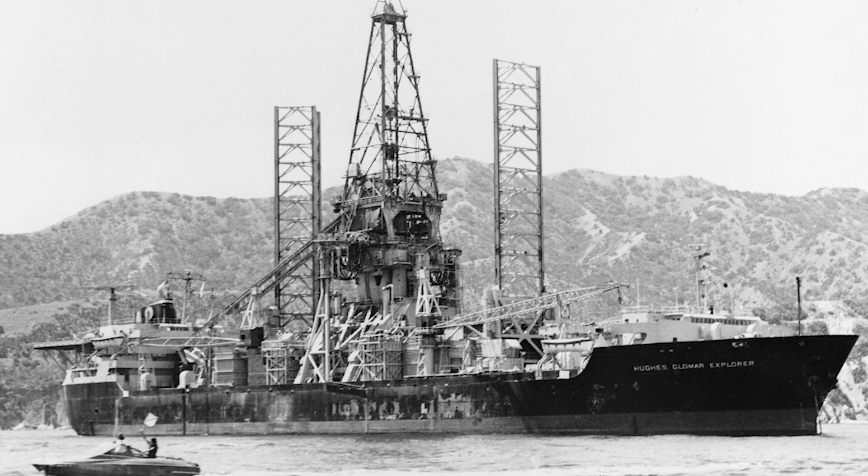July 4th, 1974, Pacific Ocean. 16,500 feet beneath the surface, a Soviet nuclear submarine lies broken in 3 pieces on the ocean floor. The K-129, carrying nuclear warheads, missile guidance systems, and codes that could shift the Cold War's balance of power.

Every salvage engineer in the world agrees, lifting 2,000 tons from such crushing depths is impossible. The water pressure alone would snap any cable system ever built. Naval doctrine states that deep-sea recovery maxes out at 10,000 feet. Anything deeper remains forever beyond human reach.

But 3 miles above the wreckage, the Hughes Glomar Explorer holds position with computer-controlled precision. Inside the ship's classified operations center, 35-year-old Sherman Wetmore watches telemetry screens as his impossible creation, a mechanical claw nicknamed Clementine, descends through the abyss on the longest pipe string ever assembled.

The CIA had approached him 2 years earlier with a challenge that defied every principle of marine engineering. Soviet surveillance ships circle nearby, convinced they're witnessing a routine manganese mining operation. They have no idea they're about to witness the greatest intelligence theft in Cold War history.

One engineer had refused to accept impossible. The briefing room at CIA headquarters carried the stale scent of cigarette smoke and classified anxiety. July morning light filtered through reinforced windows as Deputy Director Carl Duckett spread grainy photographs across the mahogany conference table.

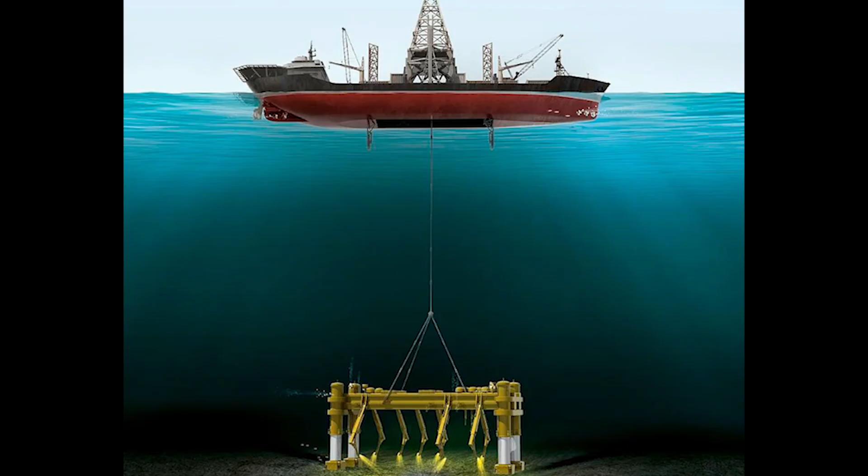"What makes you think Global Marine might see this differently?" Wetmore asked, though his mind was already racing through unconventional approaches. CIA Project Director John Parangosky leaned forward, his fingers steepled in the gesture of a man who had overseen the most sensitive reconnaissance programs of the Cold War.

"Because you pioneered dynamic positioning for Project Mohole. Because you've pushed the boundaries of deep-water engineering further than anyone in the industry. And because this isn't really about engineering," Parangosky slid another folder across the table. Inside, intelligence assessments painted a strategic picture that made Wetmore's pulse quicken.

Soviet naval activity suggested they were developing submarine-launched ballistic missiles with 1,500-mile range. Current American intelligence estimated Soviet submarine technology lagged behind U.S. capabilities by at least 5 years, but the K-129's guidance systems could reveal whether Moscow had achieved targeting precision for mid-ocean patrol stations.

"The submarine's missile compartment contains navigation computers, targeting algorithms, and nuclear warhead designs," Parangosky explained quietly. "But more importantly, it contains codebooks and operational procedures that could reshape our understanding of Soviet strategic doctrine."

Wetmore studied the technical specifications. Golf II-class submarines carried 3 ballistic missiles, each with nuclear warheads designed for targets 1,500 miles inland. If Soviet submarines could launch accurately from mid-ocean positions, they could strike American cities while remaining virtually undetectable. The K-129's guidance systems would reveal whether this capability was operational or theoretical. "The water pressure alone would crush any conventional capture system," Wetmore said, thinking aloud.

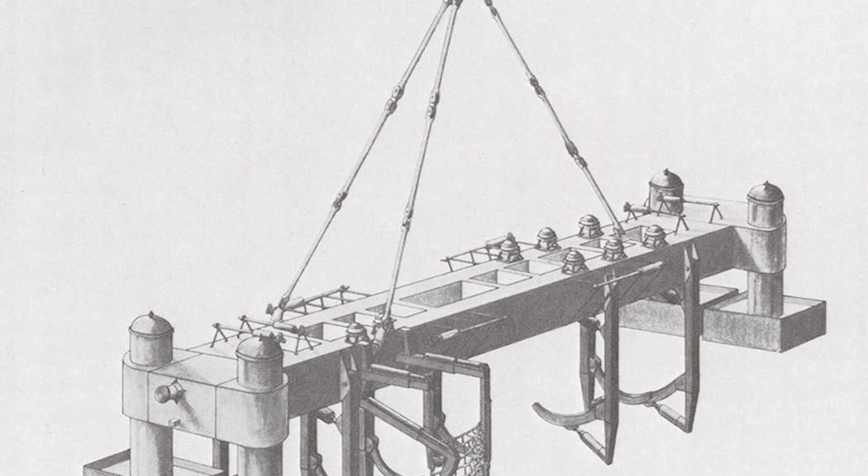The room fell silent as Wetmore absorbed the implications. 18 months to design, build, and deploy the most complex deep-sea recovery system ever attempted. 18 months to prove that American engineering ingenuity could achieve what Soviet doctrine considered permanently impossible. 18 months to steal 2,000 tons of submarine from the bottom of the Pacific Ocean while Soviet surveillance ships watched every move.

Parangosky closed the folder containing the strategic assessments. Mr. Wetmore, we're not asking you to salvage a submarine. We're asking you to steal one, and the Soviets can never know it happened.

The status quo had permanently shifted. This was no longer about marine engineering. This was about proving that democratic innovation could overcome any technical barrier the Cold War presented.

November 1971 brought Sherman Wetmore to the sprawling shipyards of Long Beach, California, where Howard Hughes' latest venture was taking shape with the precision of a military operation disguised as commercial ambition. The Hughes Glomar Explorer rose from the construction dock like a technological cathedral, 618 feet of revolutionary marine engineering that would either prove American ingenuity could overcome impossible odds or become the most expensive failure in intelligence history.

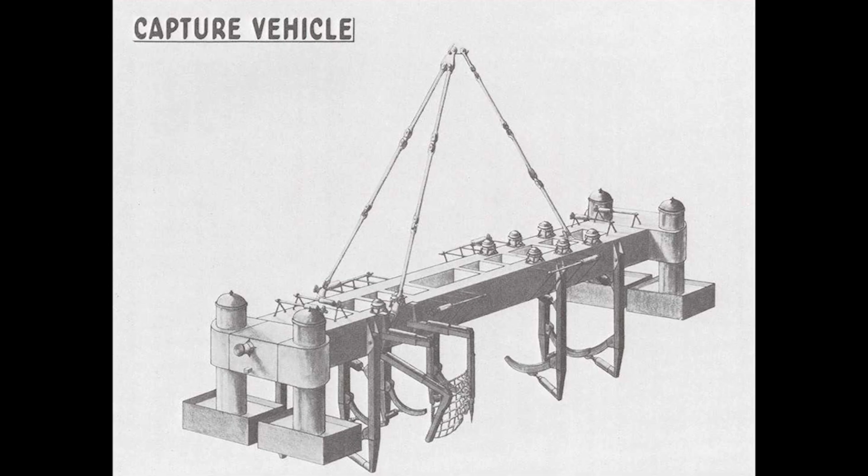Wetmore stood beside the massive hull opening that would define the entire operation's success or failure. The moon pool stretched 200 feet from bow to stern, an enormous center well that could be sealed off from the surrounding ocean once a captured object was pulled inside. No ship in maritime history had ever been designed with such an opening.

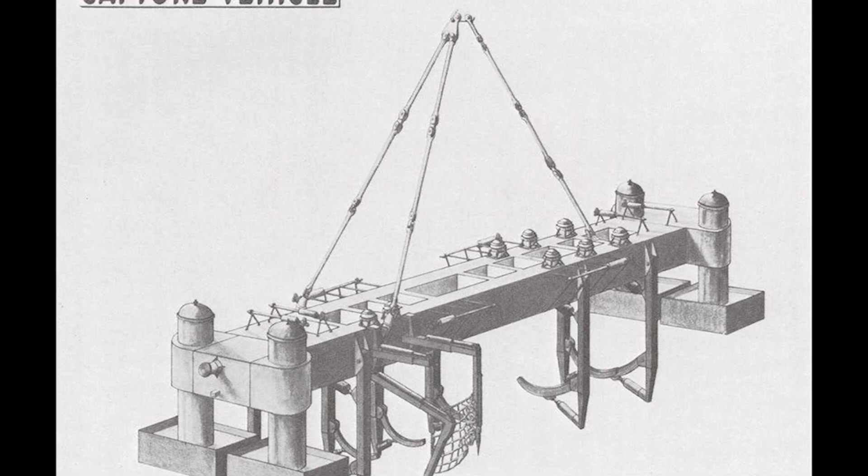Naval architects had initially declared the concept structurally unsound. The hull breach would compromise the vessel's integrity in heavy seas. But Wetmore's calculations proved the reinforced steel framework could maintain structural strength while providing covert recovery capability. The dynamic positioning system represented the first of 4 integrated breakthroughs that would make the impossible attempt feasible.

Computer-controlled thrusters mounted beneath the hull could hold the 50,000-ton ship nearly motionless above a target 16,500 feet below. The precision required was staggering, maintaining position within 100 feet, while ocean currents, surface winds, and the massive stress of lifting operations threatened to push the vessel off target.

Wetmore had adapted the technology from Project Mohole's deep-water drilling systems, but scaling it for submarine recovery required innovations that pushed 1970s computer technology to its absolute limits.

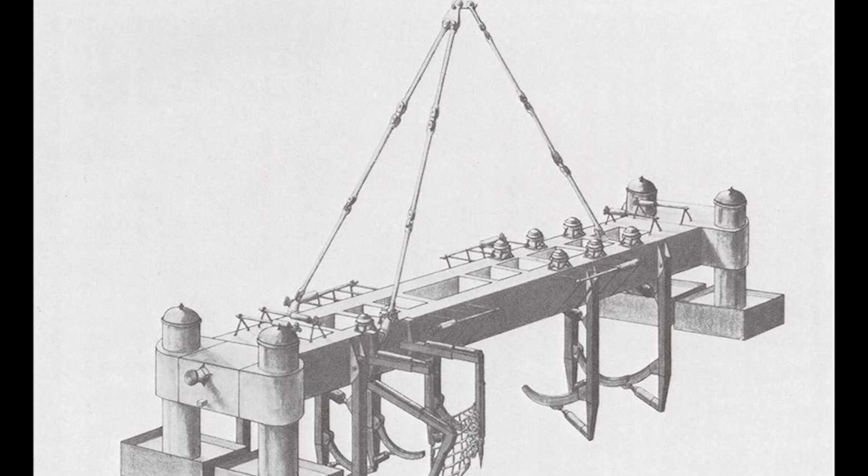The heavy-lift pipe string presented even greater challenges. Each 60-foot section connected with specially designed joints rated for 4,250 tons of lifting capacity. The complete assembly would stretch nearly 3 miles from surface to sea floor, requiring materials engineering that exceeded anything previously attempted in marine operations.

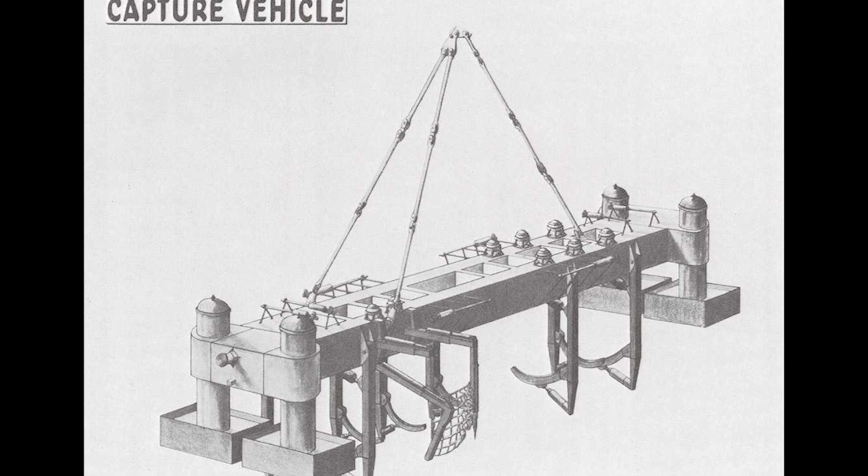Wetmore selected a tapered design, thicker sections near the surface to handle maximum stress, gradually tapering toward the bottom to reduce overall weight. Every joint underwent pressure testing that simulated the crushing forces they would encounter at maximum depth.

But the third breakthrough proved most revolutionary. Conventional hydraulic systems used oil-based fluid that would freeze solid under the pressure and temperature conditions at 16,000 feet.

Wetmore's innovation eliminated this limitation entirely by using seawater itself as hydraulic fluid. The system would pump ocean water down through the pipe string at 750 pounds per square inch to power the capture mechanism. The ocean became the hydraulic system, an elegant solution that turned the hostile environment into an operational advantage.

The seawater hydraulic concept required complete redesign of the capture vehicle's control systems. Traditional hydraulic components couldn't function with seawater, which corroded metal and lacked the lubricating properties of conventional fluid. Wetmore's engineering team developed specialized components using materials that could withstand both the corrosive effects of seawater and the crushing pressure of the deep ocean. Every valve, actuator, and control mechanism required custom manufacturing to tolerances measured in thousandths of an inch.

Howard Hughes proved as revolutionary as the technology his cover story protected. When CIA officials approached the billionaire with their audacious fiction about deep-sea mining for manganese nodules, Hughes agreed instantly. His empire of private companies provided perfect operational security, no stockholders demanding explanations, no Securities and Exchange Commission oversight, no public scrutiny of expenditures that would eventually reach $800 million.

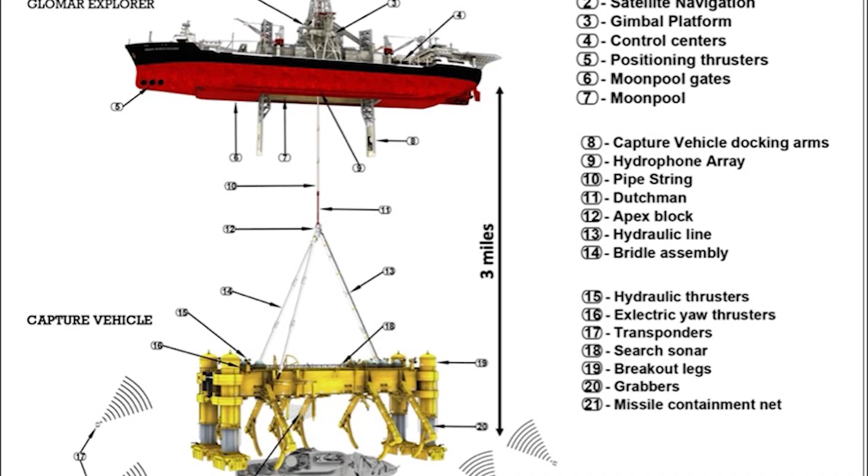But Soviet naval intelligence was drawing uncomfortable conclusions. Reports reached Moscow describing American deep-sea operations that exceeded any known commercial mining requirements. The scale of equipment, the precision of positioning systems, and the massive lifting capacity suggested military applications rather than mineral extraction. KGB analysis recommended continued surveillance while stopping short of direct confrontation.

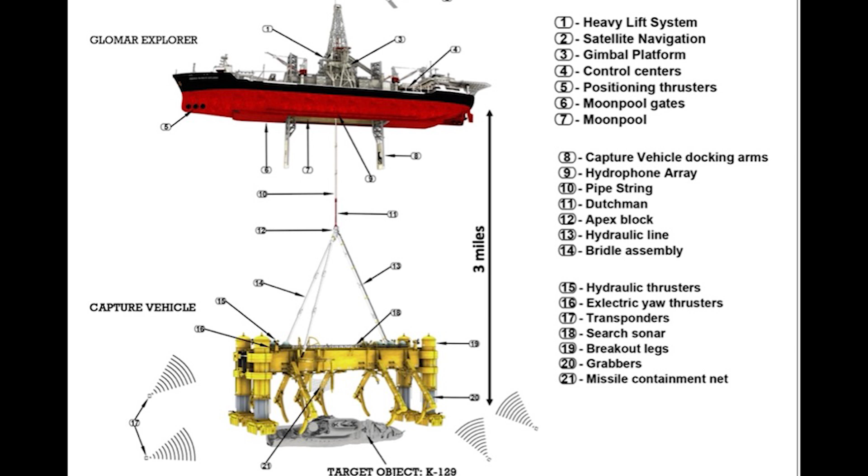By late 1973, Wetmore's impossible system was ready for operational deployment. Four revolutionary technologies had been integrated into a single platform capable of achieving what every naval engineer considered technically impossible. The Hughes Glomar Explorer could lift 2,000 tons from depths that had never been reached by recovery operations. The cover story had convinced international observers while providing perfect operational security.

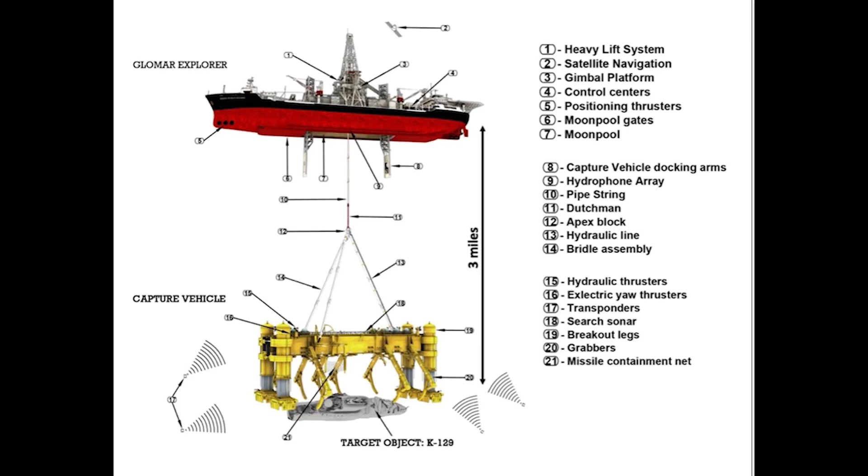The only remaining question was whether maraging steel and seawater hydraulics could function flawlessly 16,500 feet beneath the Pacific Ocean, where a single mechanical failure would doom the most audacious intelligence operation of the Cold War.

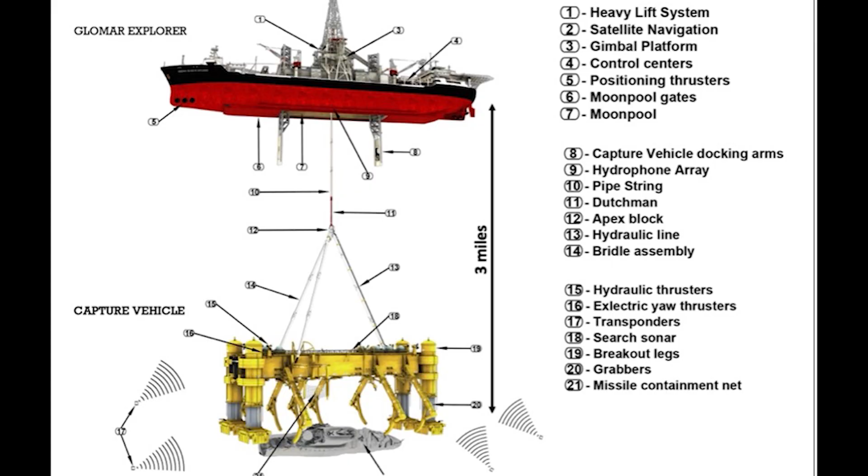April 1973 brought Sherman Wetmore to the classified workshops of Lockheed Ocean Systems in Redwood City, California, where the most complex deep-sea mechanism ever designed was taking shape in sections so sensitive that each component required separate security clearances. The capture vehicle, nicknamed Clementine, represented the convergence of mechanical engineering, materials science, and hydraulic innovation pushed beyond every known limit of underwater operations.

The strong back formed Clementine's structural foundation, two massive steel beams stretching 179 feet long and 31 feet wide, designed to distribute the enormous stresses of lifting a 2,000-ton submarine from crushing depths.

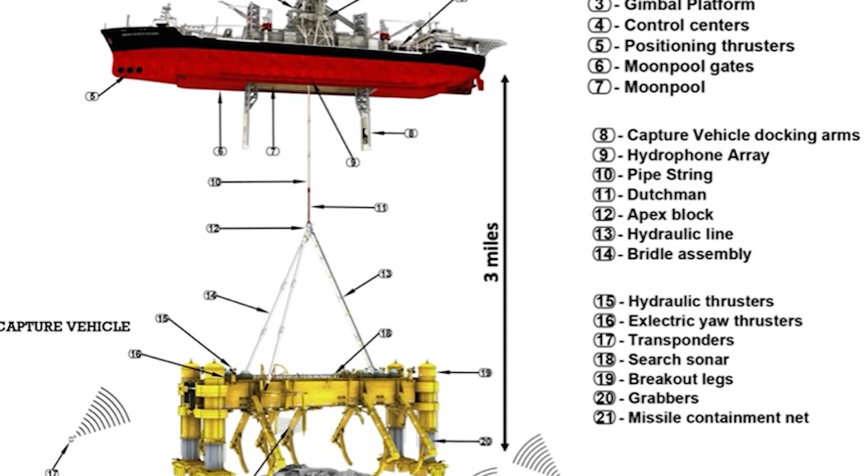Wetmore had specified the dimensions after countless calculations involving load distribution, structural integrity, and the precise geometry required to align with a Golf II class submarine's hull configuration. The beams themselves weighed nearly 400 tons, requiring specialized transportation from the steel mills of Pennsylvania to the California assembly facility.

8 hydraulically operated grabbers mounted along the strongback's length would perform the actual capture. Each grabber consisted of articulated steel fingers designed to close around the submarine's irregular hull, while it rested on soft sediment 16,500 feet below the surface.

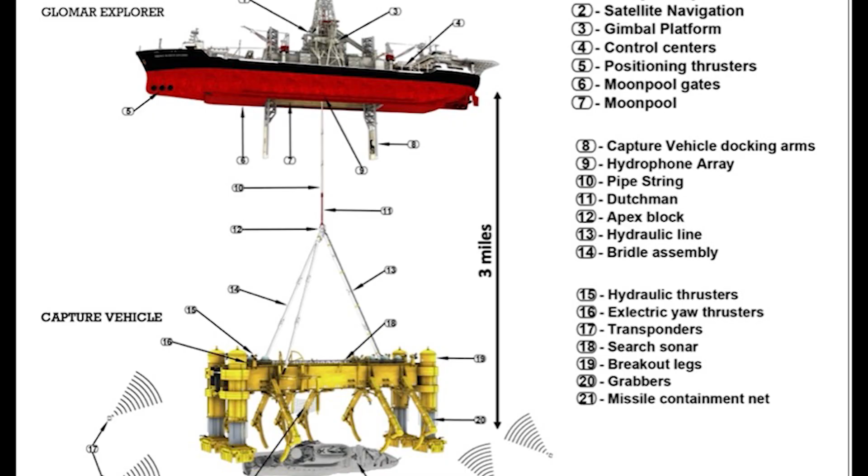The engineering challenge was staggering. The grabbers had to maintain precise alignment with 3 designated points on the submarine's hull while accommodating the unpredictable settling that occurred when a massive object had rested on ocean floor sediment for over 5 years.

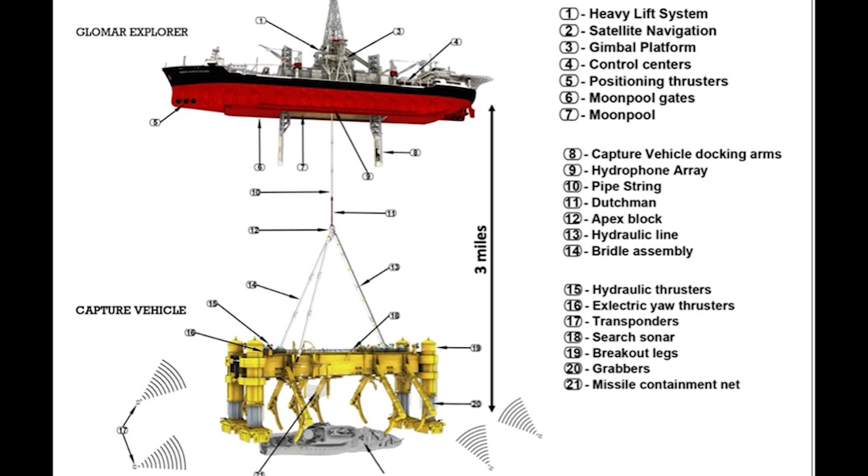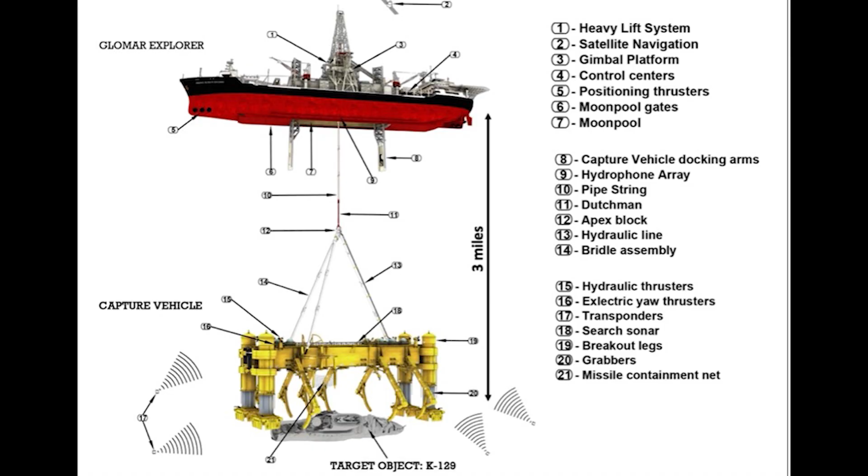Wetmore's team had identified the critical alignment points through careful analysis of the Halibut's reconnaissance photographs. The submarine's bow section offered the most stable attachment point, while the missile compartment's cylindrical structure provided secondary grab points that could distribute lifting forces without crushing the hull.

But the stern section had separated from the main wreckage, complicating the capture sequence and requiring the grabbers to secure an asymmetrical load that could shift catastrophically during the ascent.

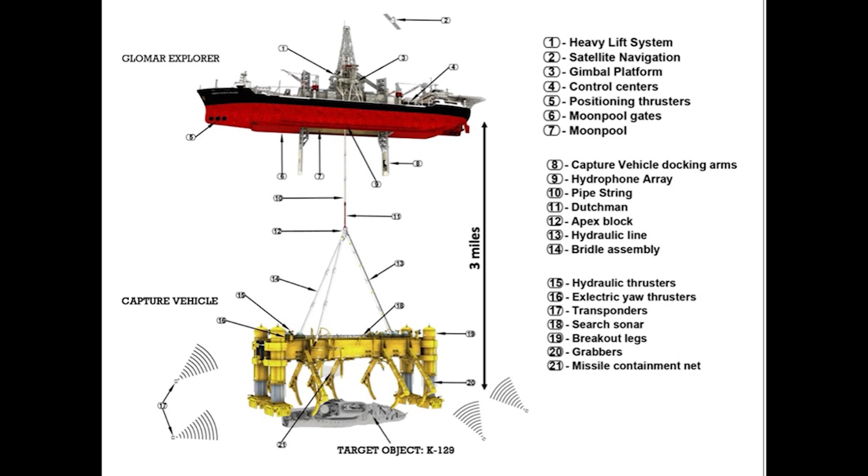The materials science breakthrough came through maraging steel, an alloy that offered incredible tensile strength but exhibited dangerous brittleness under extreme stress. Lockheed's metallurgists had tested sample components to destruction, determining that maraging steel could handle the lifting forces required for the mission while maintaining the precise tolerances necessary for the grabber mechanisms.

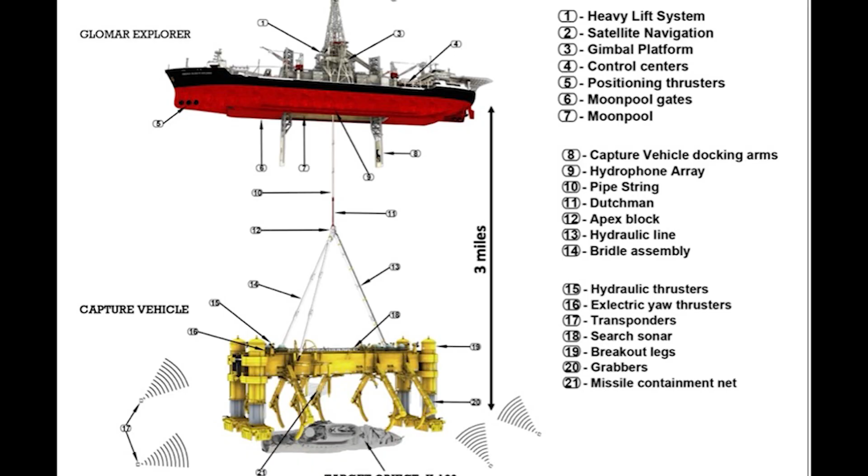But the trade-off was unforgiving: maximum strength for lifting capability, but catastrophic failure if any component exceeded its stress limits.

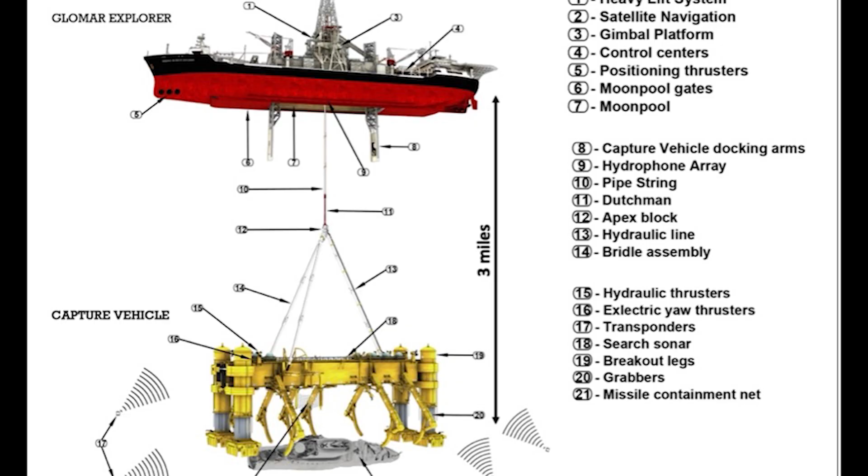The control system represented the most sophisticated remote operation ever attempted at such depths. 2 redundant 3-inch diameter electromechanical umbilical cables ran 17,000 feet through the pipe string, carrying electrical power, hydraulic control signals, and data transmission for cameras and sensors.

Each cable contained dozens of individual conductors, all insulated and protected against the corrosive effects of seawater and the crushing pressure that increased with every foot of descent.

Television cameras mounted throughout Clementine would provide visual feedback during the capture sequence, but the lighting requirements at such depths pushed illumination technology to its limits. Conventional underwater lighting systems failed under extreme pressure, requiring custom-designed units that could function at 7,500 pounds per square inch while providing enough illumination for precise maneuvering around the submarine's hull.

The hydraulic system's complexity multiplied exponentially when integrated with the capture mechanism. Seawater pumped down through the pipe string had to operate dozens of individual actuators with millimeter precision while maintaining consistent pressure throughout the 3-mile-long hydraulic circuit.

Wetmore's engineers designed pressure compensation systems that could adjust for the varying loads as grabbers closed around different sections of the submarine's hull. Testing began with scale models in Lockheed's pressure chambers, where 1/10 scale versions of the grabbers were subjected to simulated deep ocean conditions.

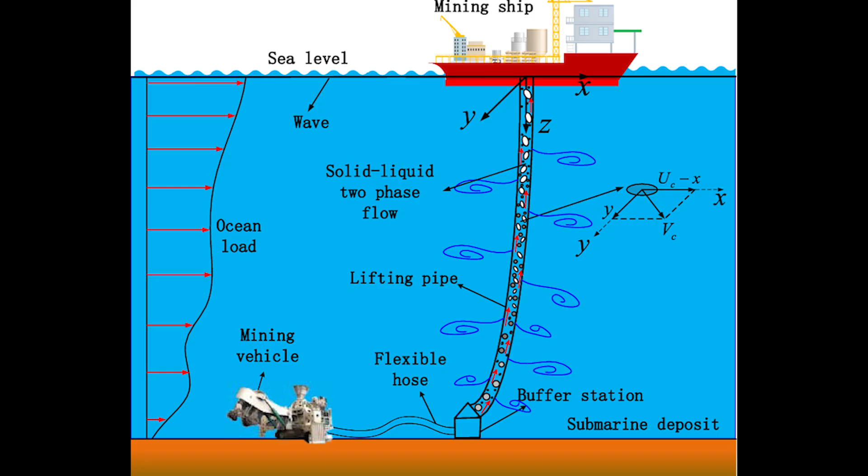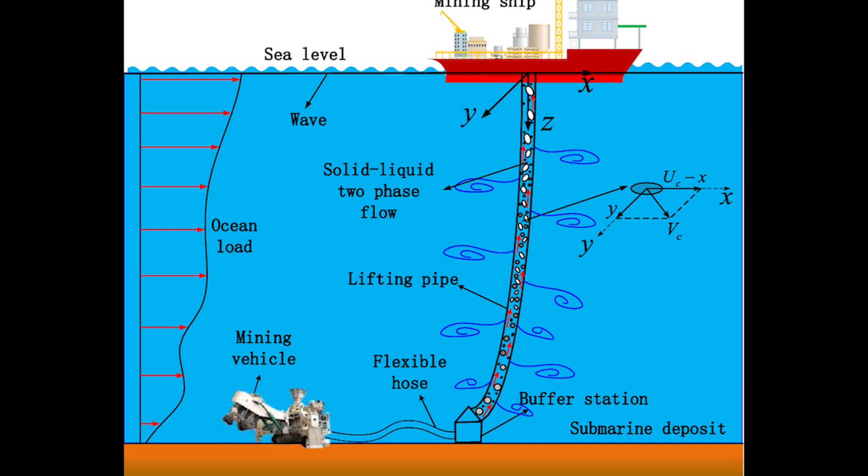December 1973 marked the completion of Clementine's final systems integration. The capture vehicle had proven capable of lifting masses exceeding mission requirements with precision control at depths never before attempted by any recovery operation. Every component had been tested beyond design specifications and proven capable of functioning in the hostile environment of the deep Pacific.

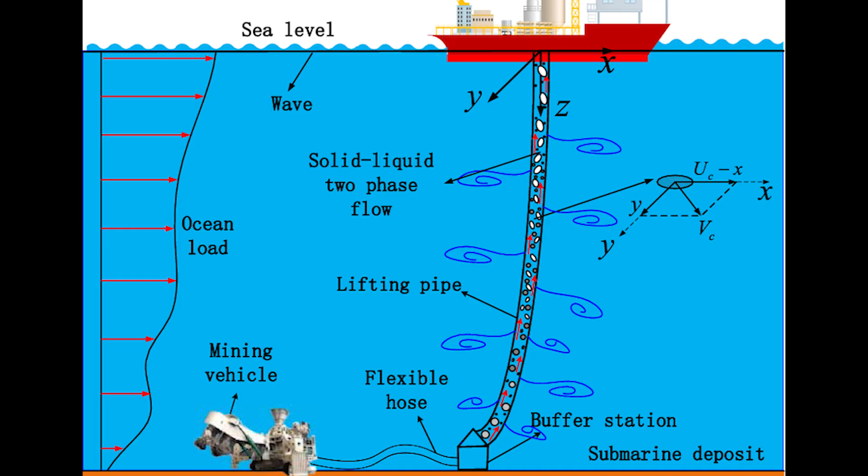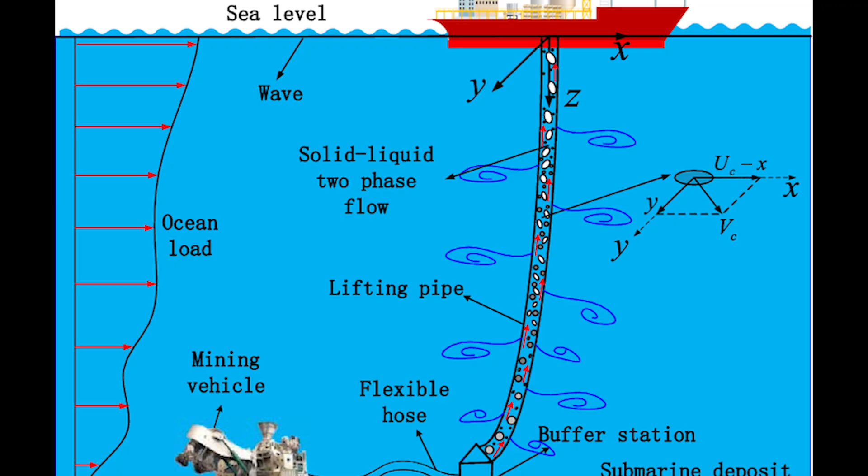The maraging steel grabbers had demonstrated the strength necessary for lifting a 2,000-ton submarine, but metallurgical analysis revealed stress patterns that approached the material's brittle failure threshold. The engineering team calculated that the grabbers could handle the expected loads with acceptable safety margins, but any unexpected stress concentration could trigger catastrophic failure of the entire capture mechanism.

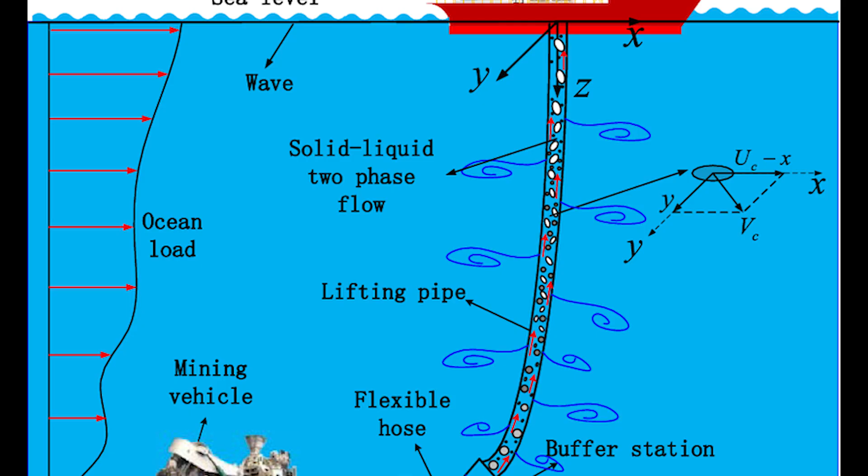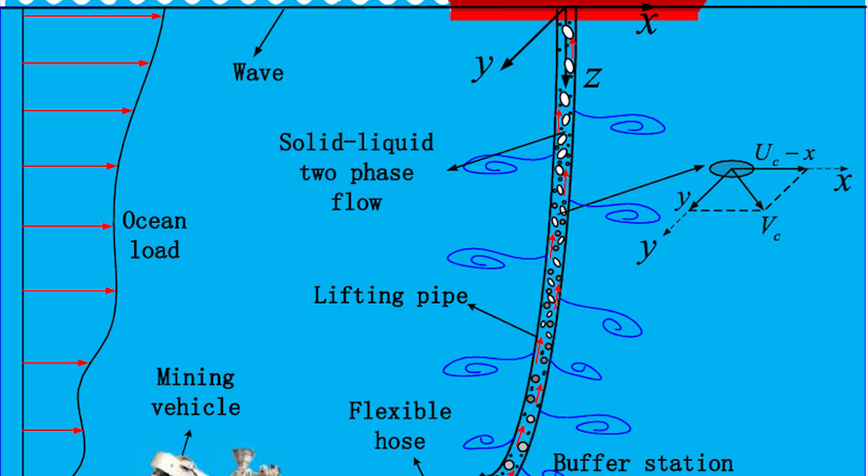As 1974 began, Clementine represented the most sophisticated deep-sea recovery system ever constructed, ready for an operation that would either prove American engineering could overcome impossible odds or demonstrate the fatal limitations of pushing technology beyond its ultimate boundaries.

July 4, 1974, brought the Hughes Glomar Explorer to position 40 degrees 6 minutes north, 179 degrees 54 minutes east, where the Pacific Ocean stretched endlessly toward the horizon under overcast skies that provided perfect cover for the most audacious intelligence operation in Cold War history.

At 1:01 p.m. local time, Sherman Wetmore stood in the ship's control center watching sonar displays confirm what reconnaissance photographs had promised 6 years earlier. The wreckage of K-129 rested in 3 sections on the abyssal plain 16,500 feet below.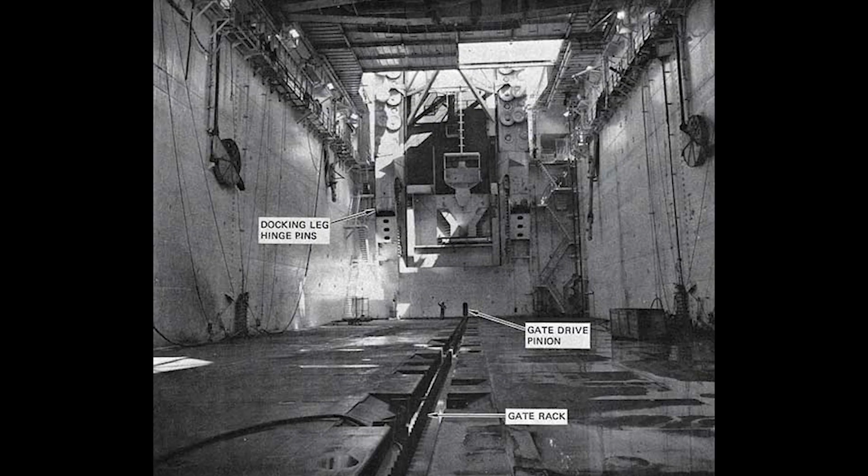The sophisticated dynamic positioning system engaged automatically as the ship reached the target coordinates, computer-controlled thrusters adjusting thrust vectors every few seconds to counteract ocean currents and surface drift. Wetmore monitored the positioning displays with the intensity of an engineer who understood that success or failure would be measured in feet rather than miles.

The submarine's remains lay scattered across roughly 400 yards of seafloor, requiring precision navigation that exceeded anything previously attempted in deep ocean operations. Soviet surveillance had intensified dramatically as the Hughes Glomar Explorer approached the recovery site.

The Chazma, a Soviet naval vessel, had shadowed the Americans for 3 days, maintaining visual contact while radioing regular reports to Pacific Fleet headquarters in Vladivostok.

A second Soviet ship, the SB-10, replaced the Chazma on July 2nd, bringing sophisticated monitoring equipment and a helicopter that circled the American vessel, taking detailed photographs of the deck operations.

But the manganese mining cover story held perfectly under Soviet scrutiny. Hughes's public statements about deep-sea mineral extraction had convinced international observers that the operation represented legitimate commercial mining rather than intelligence gathering. Soviet technical analysts had examined manganese nodule deposits in the target area and confirmed that the ocean floor contained sufficient mineral concentrations to justify large-scale extraction operations.

The pipe string deployment began at dawn on July 5th, each 60-foot section lowered through the moon pool with mechanical precision that masked the revolutionary technology beneath the routine appearance.

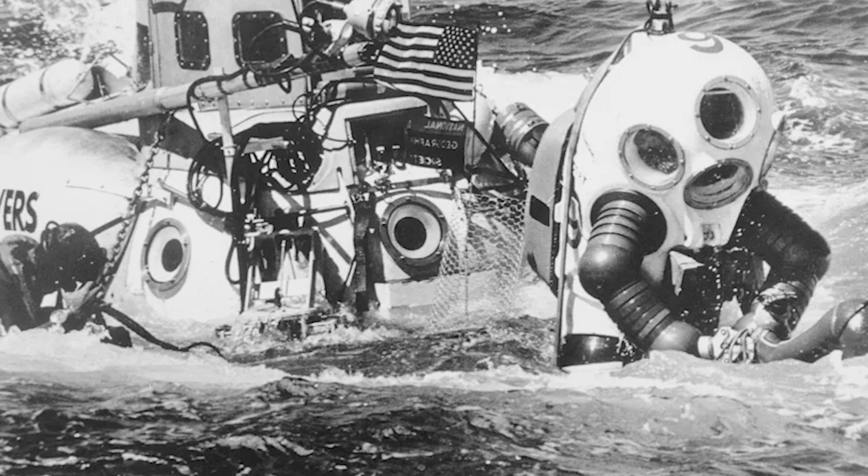Soviet observers on the surface noted unusual activity aboard the Hughes Glomar Explorer, but interpreted the operations as consistent with deep-sea mining procedures. The ship's crew maintained perfect operational security, conducting all sensitive operations within the enclosed moon pool, where Soviet surveillance couldn't observe the actual recovery mechanisms. Radio communications followed commercial mining protocols, discussing equipment status and weather conditions without revealing the historic intelligence operation unfolding 3 miles below.

The grabbers closed around the submarine's hull at 11:47 p.m. on July 8th, achieving mechanical contact with a 2,000-ton prize that could reshape American understanding of Soviet nuclear capabilities. Hydraulic pressure readings confirmed that all 8 grabbers had engaged properly, distributing lifting forces across the submarine structure without exceeding the stress limits of the corroded hull plates.

The ascent began at 100 feet per hour, a deliberately slow rate designed to prevent structural failure of either the pipe string or the captured submarine. Wetmore monitored stress readings continuously as the combined load of Clementine and the K-129 created unprecedented tension throughout the lifting system. The tapered pipe string performed exactly as calculated, with thicker sections near the surface handling maximum stress, while the gradually reduced diameter toward the bottom minimized overall system weight.

At 8,000 feet depth, telemetry confirmed that the submarine remained stable in Clementine's grasp, while 3 miles of pipe string held steady against the enormous forces involved. The impossible was happening with mechanical precision. American engineering was lifting a Soviet submarine from depths that every naval expert had declared permanently beyond human reach.

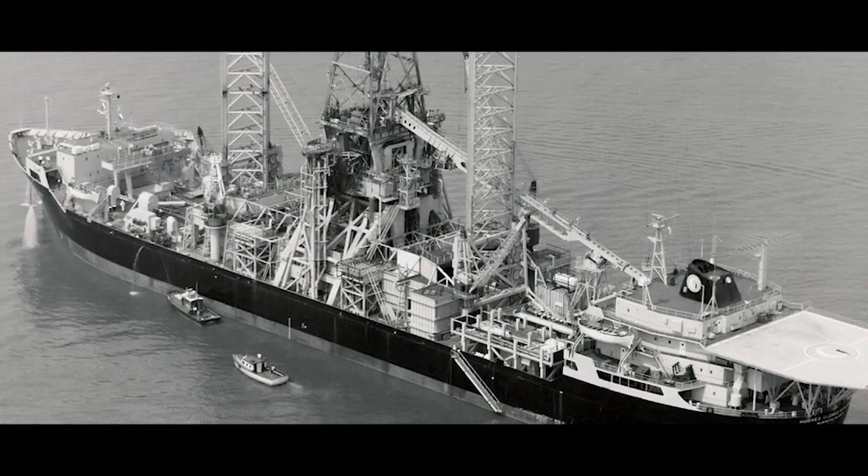August 1974 found Sherman Wetmore standing in the sealed moon pool of the Hughes Glomar Explorer as Clementine's surviving grabbers delivered their truncated prize, 38 feet of Soviet submarine bow that represented both technological triumph and devastating intelligence failure. The forward compartment had survived the catastrophic ascent intact, but the missile compartment containing nuclear warheads, guidance systems, and cryptographic materials now rested permanently on the Pacific floor, 16,000 feet beyond any future recovery attempt.

The human cost emerged first as recovery teams entered the flooded bow section. 6 Soviet sailors' remains were discovered in the forward torpedo compartment, their bodies preserved by the crushing cold and pressure of the deep ocean. These men had died instantly when K-129 imploded during its final dive 6 years earlier, never knowing their submarine would become the target of the most audacious intelligence operation in naval history.

CIA protocol demanded immediate analysis of the recovered materials, but Wetmore insisted on honoring the Soviet sailors first. In a classified ceremony conducted within the ship's moon pool, American naval personnel gave their Soviet counterparts full military honors. The bodies were placed in a specially constructed metal casket due to radioactivity concerns from the submarine's nuclear reactor, then committed to the sea with the same dignity accorded to fallen American servicemen.

The irony wasn't lost on anyone present, enemies in life, but sailors bound by the common brotherhood of men who had chosen to serve beneath the waves.

The intelligence harvest from the truncated recovery proved more valuable than initial assessments suggested. The forward compartment contained 2 nuclear torpedoes with warheads that revealed Soviet nuclear weapon design principles previously unknown to American analysts.

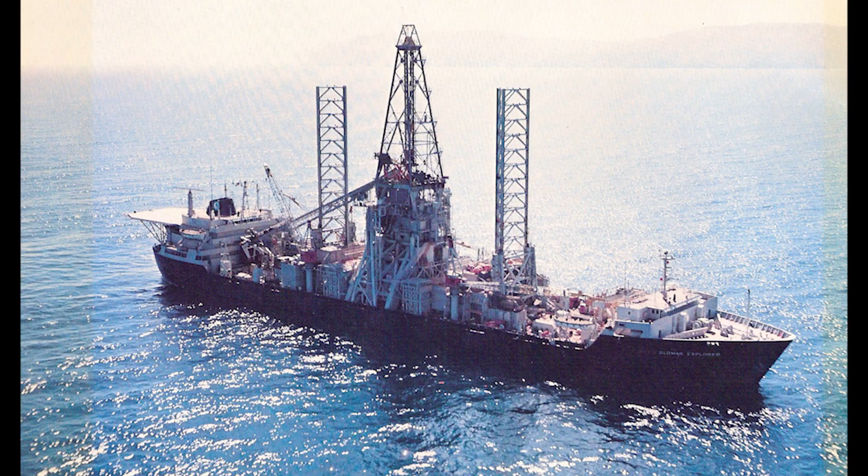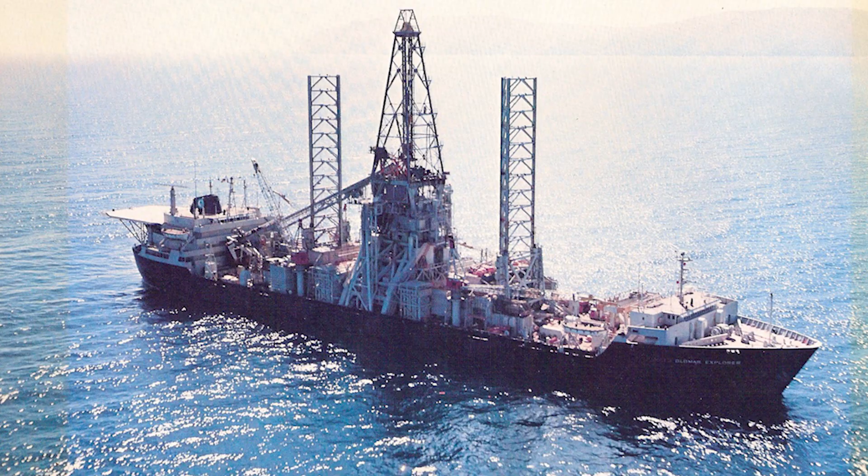Years later, Wetmore would reflect on the operation with quiet pride, tempered by the knowledge that mechanical failure had prevented complete success. But the patriotism and dedication of hundreds of Americans who had maintained perfect secrecy while pushing technology beyond all known limits had achieved something more valuable than intelligence, proof that democratic innovation could triumph over any challenge totalitarian systems might present. The impossible had become inevitable when American engineers refused to accept conventional limitations as permanent barriers to national security.